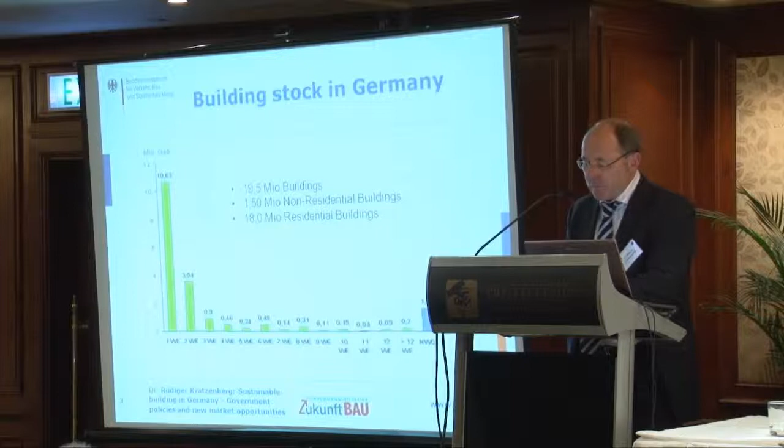The proportion of the types of buildings is obviously different to Hong Kong. More than 10 million one-family houses, less than 1% houses with more than 10 housing units. Most of the dwellings in Germany are let, around 65%. Space heating accounts for 34% and hot water requirements account for about 4% of the total end-use energy consumption of the Federal Republic of Germany. 65% of the heating energy goes to the private sector.

The mean energy consumption in the building stock in Germany is around 220 kilowatt hours per square meter per year. According to the current regulations, new buildings constructed since 1995 have an average energy consumption of less than 100 kilowatt hours per square meter per annum.

Today, there is a consensus in the international community that climate change represents an economic and ecological danger. The European Union has set itself far-reaching strategic goals. These focus mainly on reducing carbon emissions in the EU from their 1990 levels by at least 20% by 2020, increasing the renewable energy share of total energy consumption to 20% by 2020, and, maybe the first step and the most important also, cutting energy consumption by 20% of the level forecast for 2020.

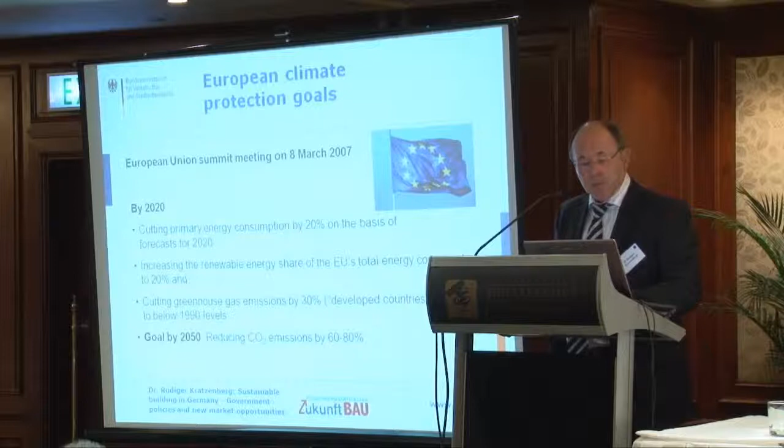In 2010, the federal government of Germany adopted an energy strategy, and following the Fukushima disaster and a decision to shut down our nuclear power plants in Germany by 2022 at the latest, this energy strategy has been reinforced once again. Its major benchmarks are now, as you can see here: reduce primary energy demand by around 80% by 2050, reduce heating demand by 20% by 2020, introduce climate-neutral buildings in the new build sector starting in 2020, and draw up a refurbishment roadmap for the building stock with which the rate of refurbishment can be at least doubled.

Ladies and gentlemen, energy efficiency has become a driving force behind sustainable development in Germany. In order to increase energy efficiency in the building sector, the German government has three main courses of action available to it. First, it can introduce statutory legislation that sets efficiency requirements. Second, it can promote financial measures that are not supported by statutory legislation. And third, it must inform and educate citizens about this issue.

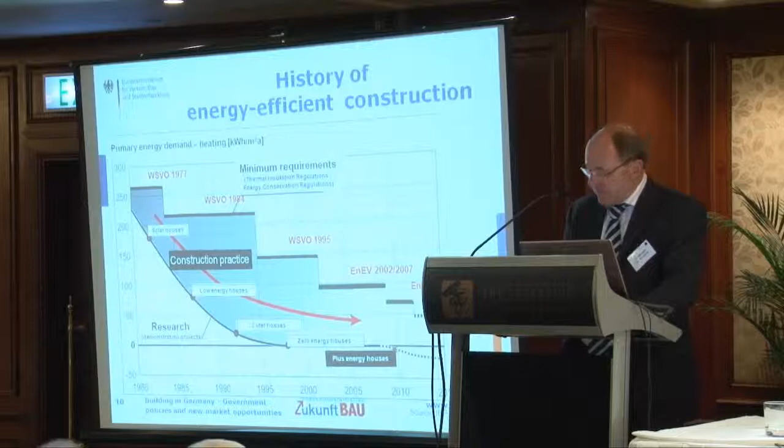The Energy Saving Ordinance stipulates maximum values for energy demand in buildings. It concerns in particular the insulation of buildings, heating, cooling, ventilation, and lighting. It evaluates the energy source in use with regard to its environmental impact.

It applies both to new builds and buildings undergoing refurbishment. The ordinance lays down the requirements for issuing energy performance certificates and states who may issue these certificates.

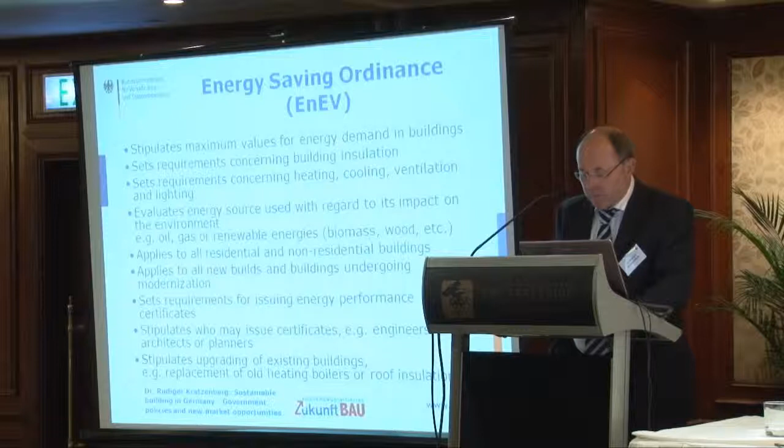The existing Energy Saving Ordinance will facilitate the complex process of evaluating the energy efficiency of building envelopes, fixed building services, and lighting. The primary requirement is a reduction of primary energy demand. It's important that there are no stipulations regarding the type of technology that should be used to achieve these goals. As Mr. Lauch says, up to the free market.

Most users or building contractors are not really construction experts, professors, civil engineers, and so on. Energy performance specifications must be explained in a way that is understandable. As with consumption in the case of cars, energy demand with regard to buildings must be presented in clear and concrete terms.

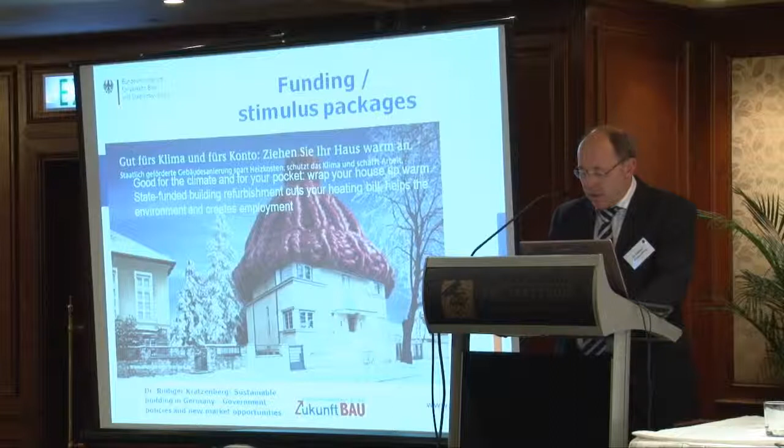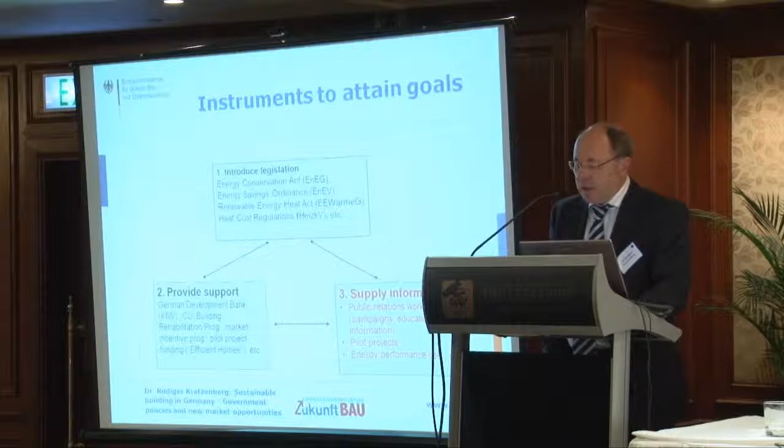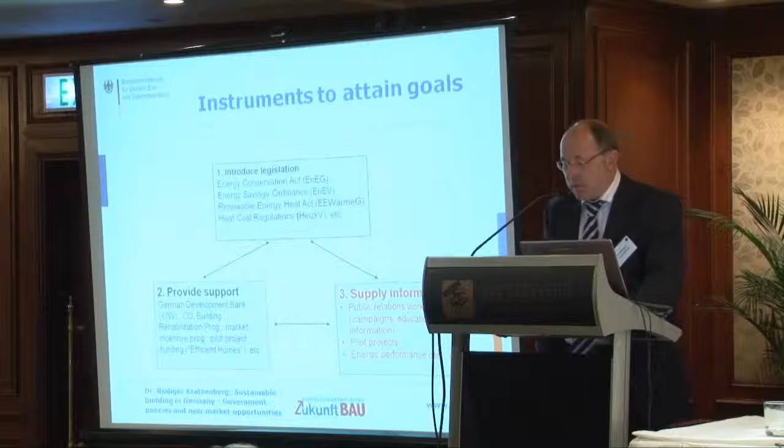The third approach is to provide information and to communicate with building contractors and users. To this end, the German government founded the German Energy Agency with several major German banks in the year 2000. This is a private company responsible for promoting energy-saving initiatives.

Sustainable development means more than just energy efficiency. Sustainability means to take the entire life cycle cost of a building into view, from the initial planning concepts to the removal and recyclability of a building after its useful life has ended.

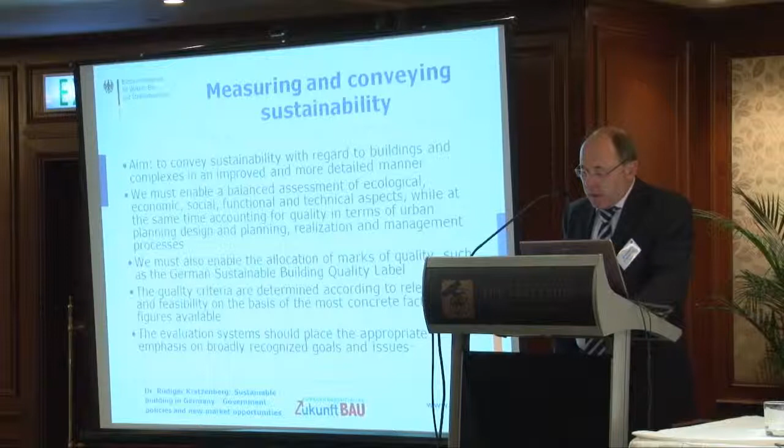It's an aim in Germany to define sustainability in an improved and more detailed manner with regard to buildings in the future. We must make it possible to perform a balanced assessment of ecological, economic, social, functional, and technical aspects. Buildings that present documentation proving they meet the relevant requirements should also be awarded a mark of quality, such as the German Sustainable Building Quality label.

When evaluating sustainability, we considered it particularly important to accord equal importance to ecological quality, economic quality, socio-cultural and functional quality, and technical quality, with 10% accorded to the process quality. These individual aspects can be divided into various groups of criteria. These criteria are composed of further individual criteria. Each criterion has its own set of clearly definable benchmarks.

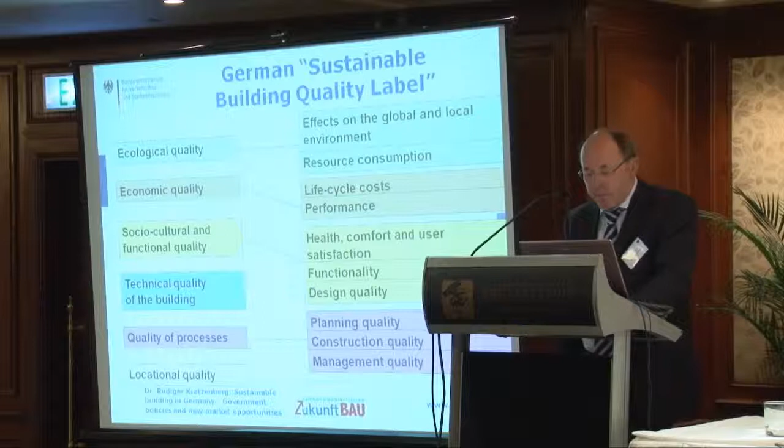Private enterprise and the state jointly developed the content of the German Sustainable Building Quality label. The German Council for Sustainable Building, DGNB, played a key role as a partner in this process. The results of the assessment can be shown as a percentage, a mark or certificate in either gold, silver, or bronze.

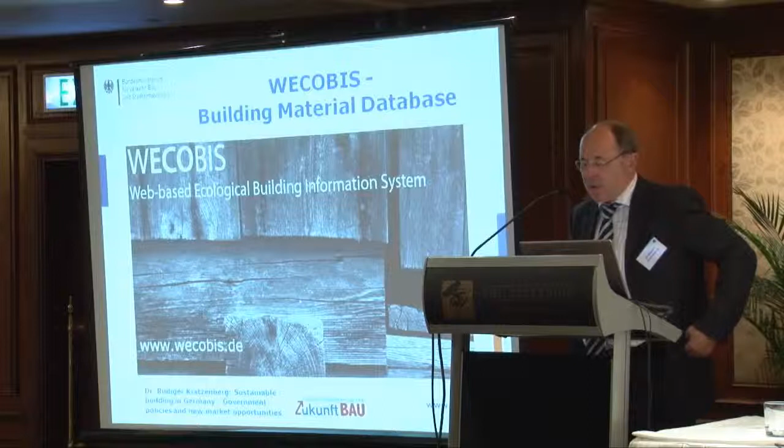To build sustainable houses needs plenty of information. This has to be made available to planners and the construction industry. One more important instrument I would like to mention is WECOBIS, a web-based ecological building information system. It's operated by our ministry together with the Bavarian Chamber of Architects.

You know, Bavaria is the lucky land in the southern part of Germany where the Oktoberfest is now held at the moment. And Hong Kong is not too bad to be.

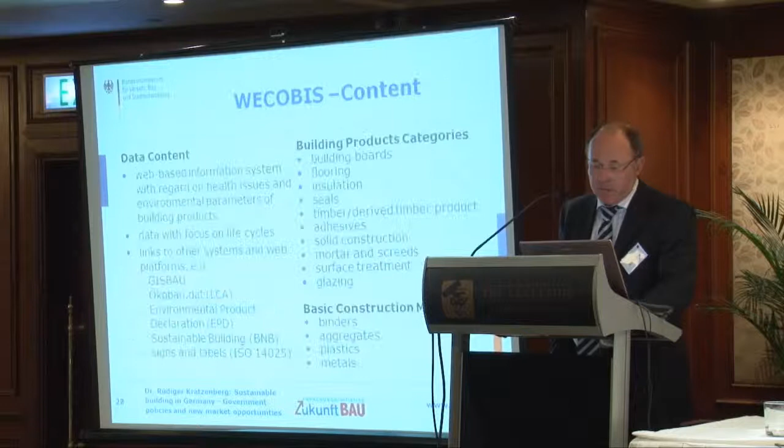This system provides information about building products with regard to health issues and environmental parameters. Anybody who is a little bit curious now is invited to have a look on the internet at WECOBIS.

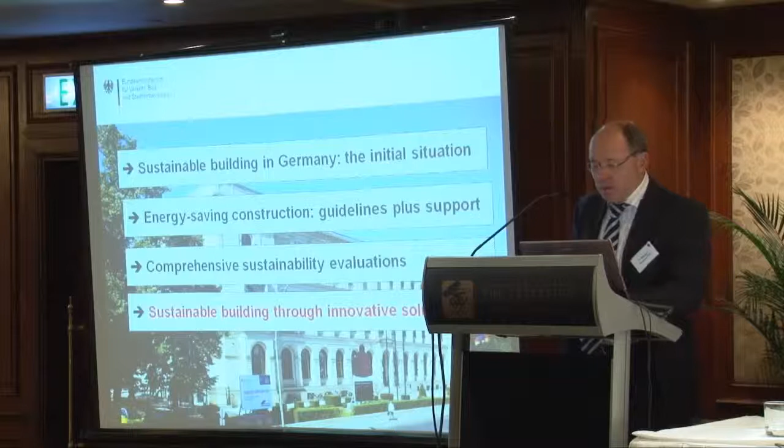Sustainable building is only possible through greater innovation in construction. In Germany, I would like to point out, there's a great enthusiasm for future technologies. The Federal Ministry of Transport, Building and Urban Affairs launched the initiative Future Building 6 years ago. This is a kind of research program we are running every year.

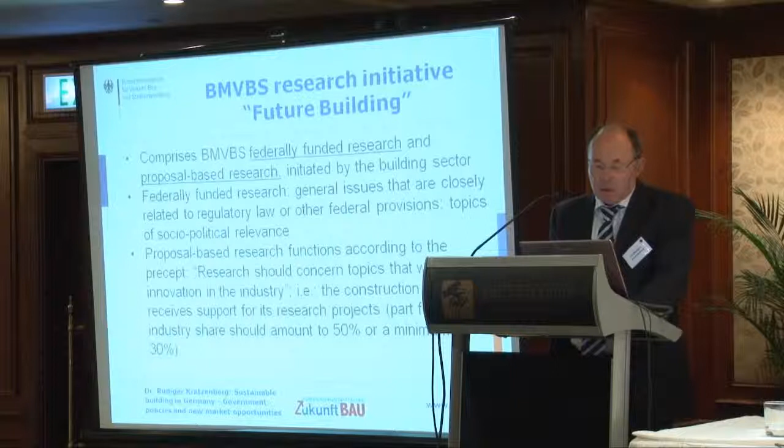We have elaborated 7 research clusters, for example, energy efficiency, renewable energies, plus energy housing, sustainable building, demographic change, and so on. I won't read out all of them now.

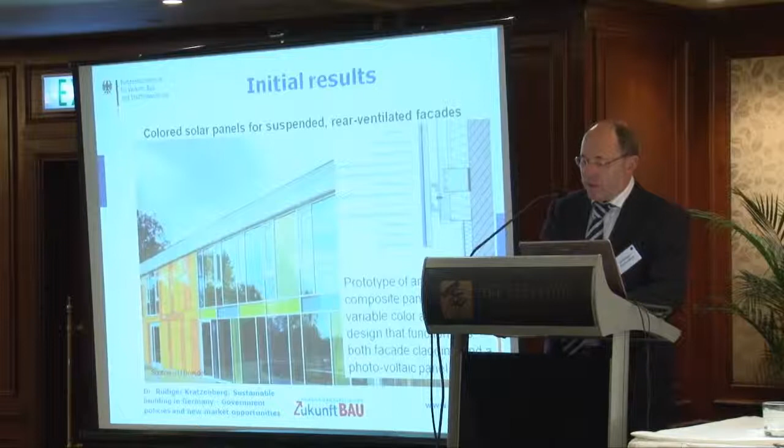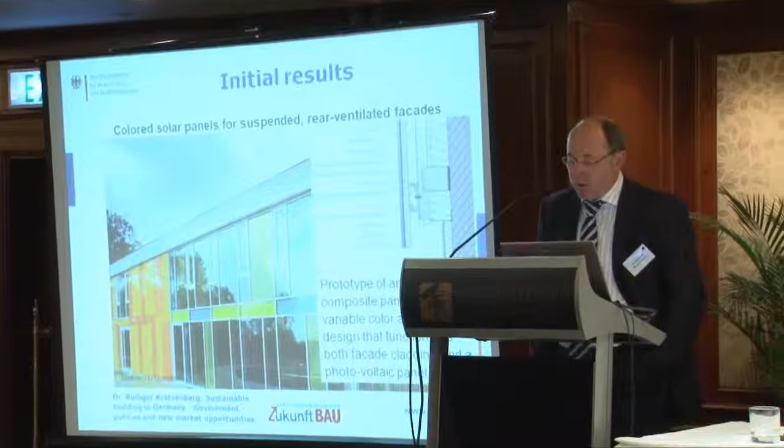From 2006 to 2012 in this research program, approximately 53 million euros were allocated to research projects in the areas of proposal-based research alone. One interesting result from these projects are colored solar panels for suspended rear ventilated facades. This promotes the integration of renewable energy in the building envelope. It's also kind of architecture you can use with these PVs in colored and different shapes.

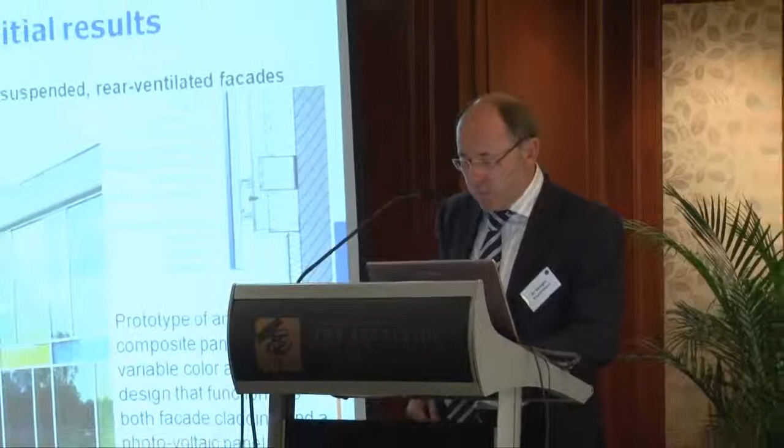The objective of climate neutral buildings is outlined in the EU's Energy Performance of Buildings Directive, asking new buildings to be nearly zero energy buildings after 2020. The directive defines that the nearly zero or very low amount of energy required should be covered to a very significant extent by energy from renewable sources. So this comes into force for private houses from 2020, for the public houses even in 2018.

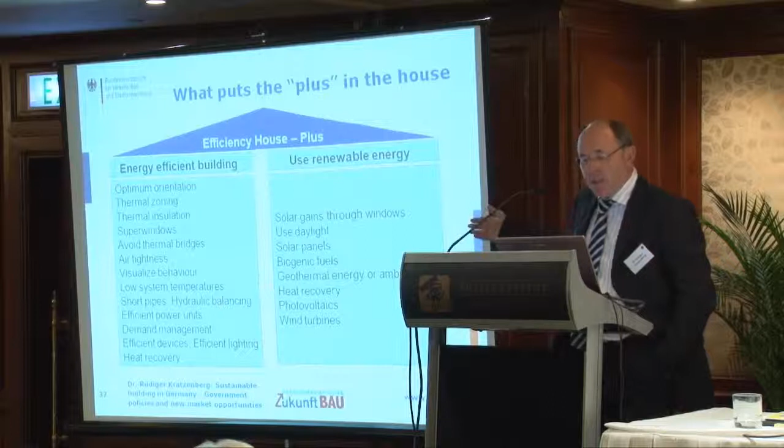Plus energy means that in my annual energy balance, I can provide more renewable energy than is needed to operate my building. This objective cannot simply be achieved by means of a large renewable energy system. A range of different approaches is needed, some of which are shown on this slide. The main instrument at the moment is PV, photovoltaic solar plants, but you see it's a very big range of instruments, and you have to decide by planning which to use in a special site.

In 2007, Darmstadt University of Technology developed a plus energy house as a part of the Future of Building research initiative in order to participate in the Solar Decathlon competition in Washington, D.C. The most important objective of the model houses, whose performance is tested in 10 disciplines, is to generate more energy than the house can consume when it's being used at full capacity. In 2007, and again with a new model house in 2009, Darmstadt University of Technology won this competition.

In 2010, the development was going on. A house was erected again for a further experiment in the city of Essen in Germany. Our federal minister, Dr. Ramsauer, brought an electric vehicle with him to the inauguration in Essen. You can see here a Mercedes-Daimler Smart electric vehicle. Using the surplus energy produced by this plus energy house, the vehicle is able to operate for almost 80,000 kilometers a year.

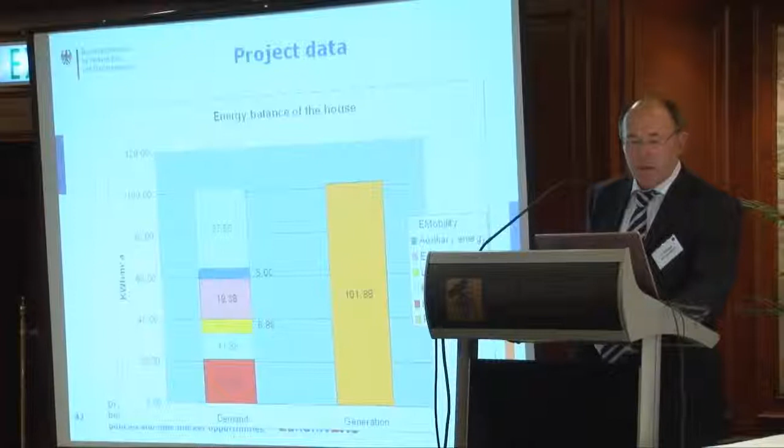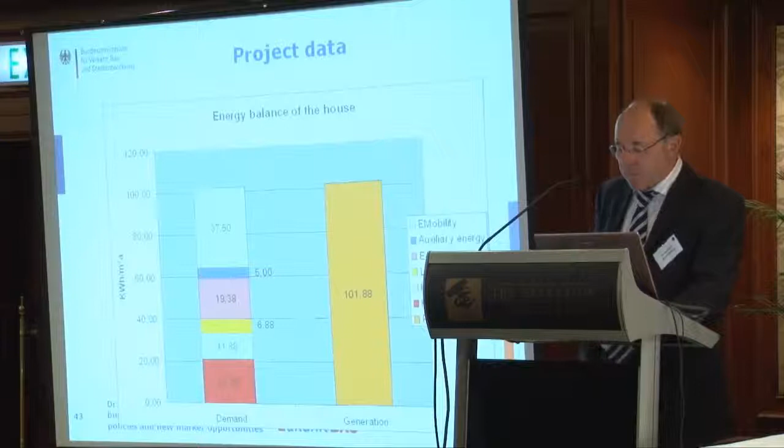A single family house for a family of 4 has been constructed, comprising a floor space of about 130 square meters on 2 levels. In front of the house, there will be a so-called showcase for vehicle parking and for accommodating the charging infrastructure for electric mobility. Breaking down the energy balance by floor space illustrates the final energy demand of the house in detail, as you can see here. So, of course, a great part is for heating in Germany, also e-mobility, the cars, 37%. Just 2 more pictures of our Energy Plus house, which is at the moment under real test by a family, parents, 2 girls, and they are testing it for 1 year.

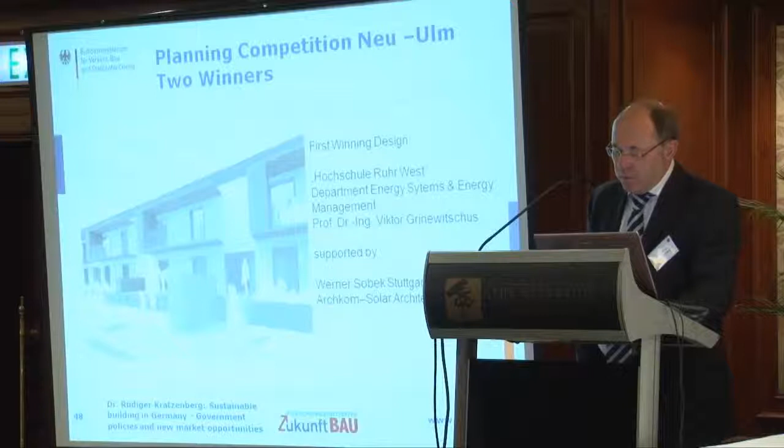So, to come to an end now, our slogan, "My house is my filling station," is no longer a futuristic vision. It becomes more and more real.